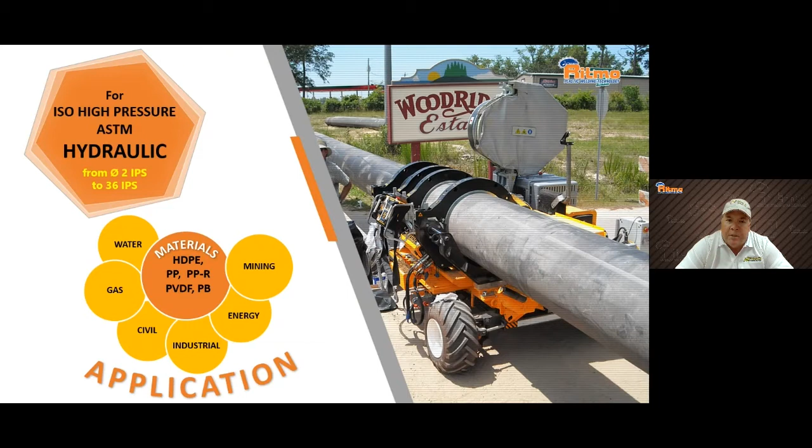The all-terrain unit operates through the Easy Life system. You've got a self-propelled drive system depending on the size of the unit. It could be a two-wheel drive, two-wheel steering unit, as well as when you get to the larger unit, like the 24-inch machine, it's a four-wheel drive, four-wheel steering, and you can actually crab crawl this particular unit on the job site for easier use.

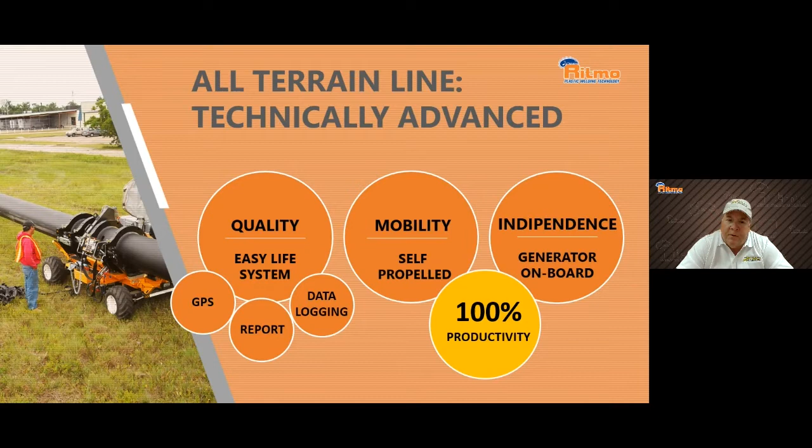All of our units can be used with IPS inserts, DIPS inserts, and millimeter pipe inserts as well, all of which can be changed in and out with our smart lock technology for changing the inserts into the jaws. We use a master cylinder, a master insert, when going from some of our 14-inch equipment down to the 4, 6, and 8 sizes, and also when we go up to our 36-inch machine coming down to 14-inch, we'll use a master insert system as well.

Here on the diagram of the Delta 355 all-terrain, you'll notice that the control panel is to the right. We've got the onboard generator in the back for our 355 units. They are all Honda motors. Once you go to the 500, the 20-inch machine, or the 630, the 24-inch machine, or even the 1000, the 36-inch machine, we switch over to a diesel motor power.

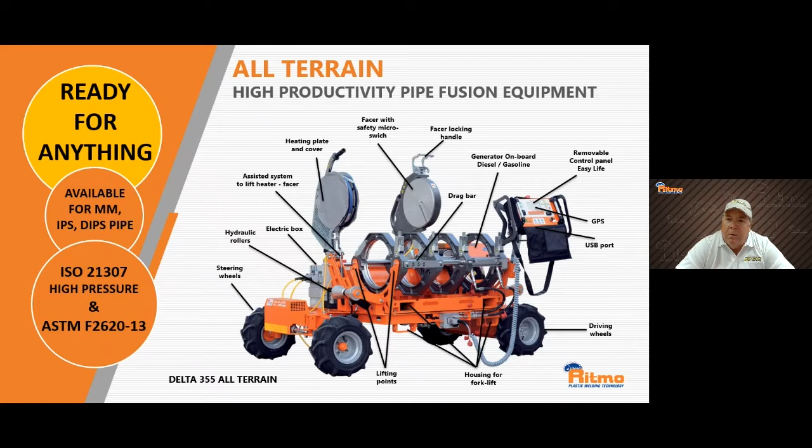For in-ditch use, we can very easily pull off the set of jaws from the chassis of the unit. There is an in-ditch kit required to go with this when you do so. The nice thing about this design is we do not have to remove the fourth jaw or the outer jaw in order to accommodate T's, crosses, lateral Y's, or elbows. We can simply make an adjustment with how jaws 3 and 4 are bracketed, so we're not losing parts or pieces. We can simply adjust the jaws to accommodate those fittings.

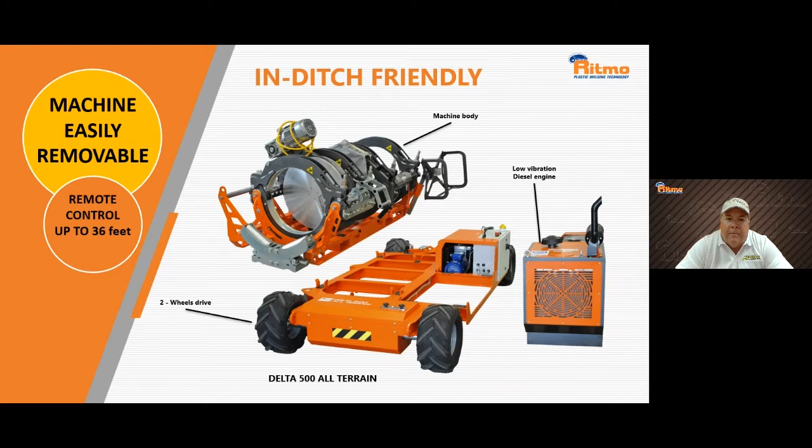On our small sizes, we have two manual size units that go from 1-inch to 5-inch, and then a manual unit that goes 2-inch to 6-inch. As far as hydraulic goes, we have a 2-inch to 8-inch machine, and a 4-inch to 14-inch machine. So that's the Delta 250 trailer, and then the Delta 355 trailer and all-terrain.

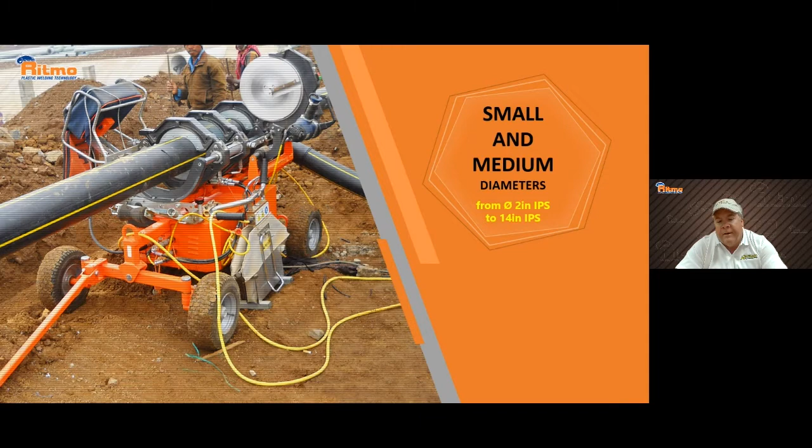There's the mention of the smart lock patented device that allows for quick and easy removal of the inserts on any of the units of this size.

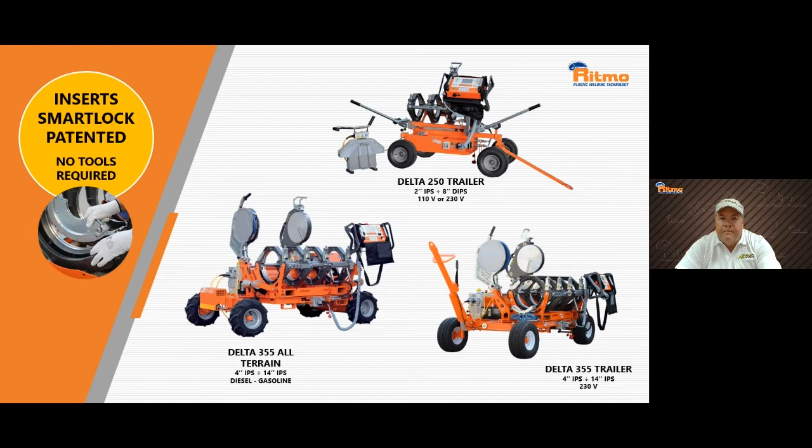The medium diameter, we're going to jump from 8-inch up to 20-inch IPS. That encompasses typically the Delta 500 trailer or Delta 500 all-terrain. Those will range from 6-inch IPS, and the jaws themselves will actually allow you to do 20-inch IPS as well. The one thing you'll notice about these pictures and the previous pictures with the trailer, the Delta 250 trailer and so forth, is that the control panels are all identical, the same. So if you can operate that 2-8 unit, you can operate the 14-inch machine, the 20-inch machine, 24, 36-inch machine, etc.

The one feature that our 500 unit has is our patented assisted jaw opening and closing. They're essentially assist cylinders. Those jaws can become pretty heavy when you've got any of the inserts in there, whether they're the 6-inch, 8, 10, 12, etc. So there is an assist device on each one of those jaws to accommodate that weight as you put those inserts in and out.

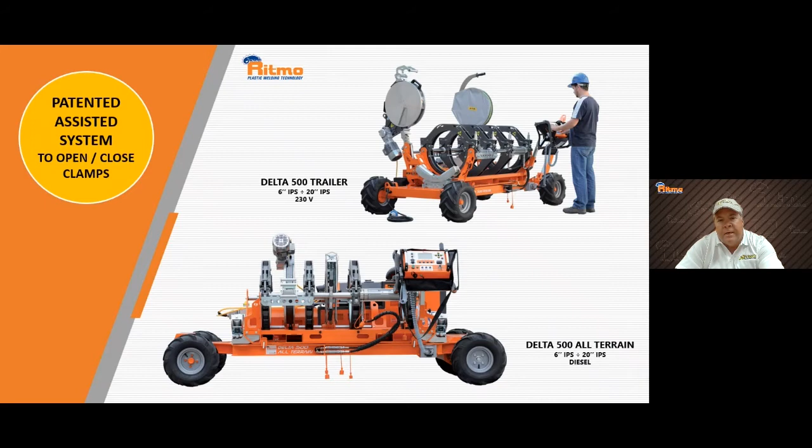The medium to large, now we're jumping up to the units that will go up to 24-inch and even 36-inch. On that 24-inch machine, which is the Delta 630 trailer or Delta 630 all-terrain, or even going up to the Delta 1000 trailer, all of those jaws are hydraulically opened and closed, hydraulically locked. The heating plate, the facer, even the pipe rollers to guide the pipe into the jaws, those are all hydraulically driven so that it's a lot more user-friendly and allows you to operate it in a more safe environment. This 24-inch machine here in particular is the four-wheel drive, four-wheel steering, which allows you to crab crawl the unit around the job site for easier maneuverability.

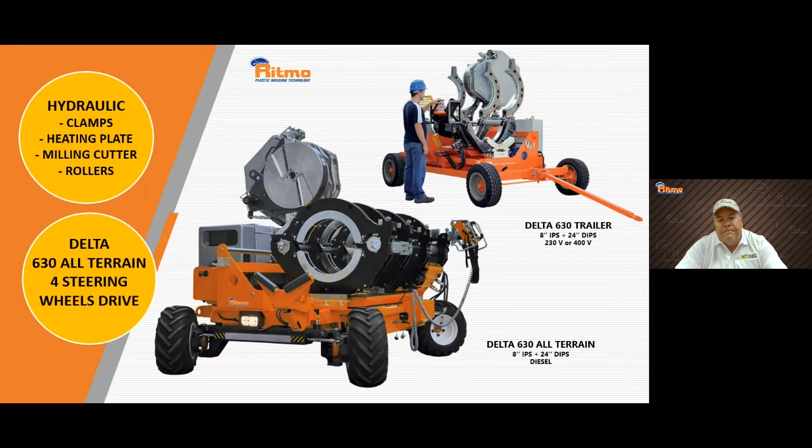Large diameter unit, the largest one we have goes up to 36-inch IPS. And with a set of master inserts, you can reduce that all the way down to 14-inch IPS. So that's quite a range, going from 14 IPS all the way to 36-inch IPS.

This particular unit is our trailer unit. It requires a power source. The control panel is still your standard Easy Life control panel. It's not interchangeable with the smaller units, but the operation and the design are identical. So if you can operate one, you can operate all.

A little piece of information that's going to be happening here real soon for Ritmo and EGW, and that is this 36-inch unit will soon be available in the US on tracks as well.

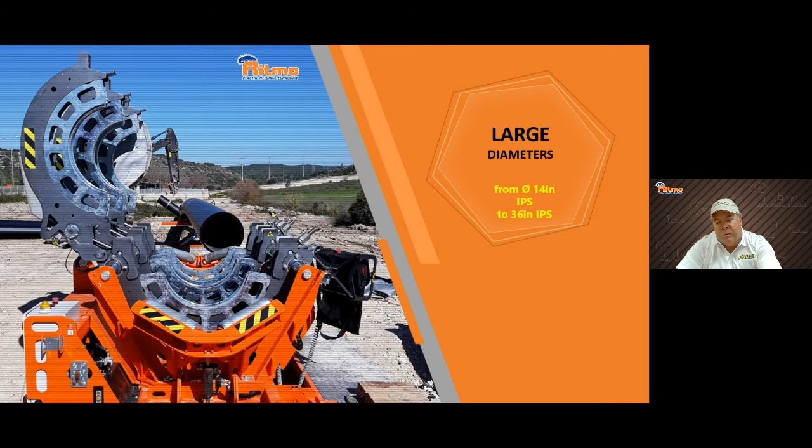There again, the operation of the 36-inch unit, you've got hydraulic jaws that help opening and closing, hydraulic locking of the jaws. Same thing with the heater plate and the facer. All of this is designed to increase productivity, safety, and efficiency.

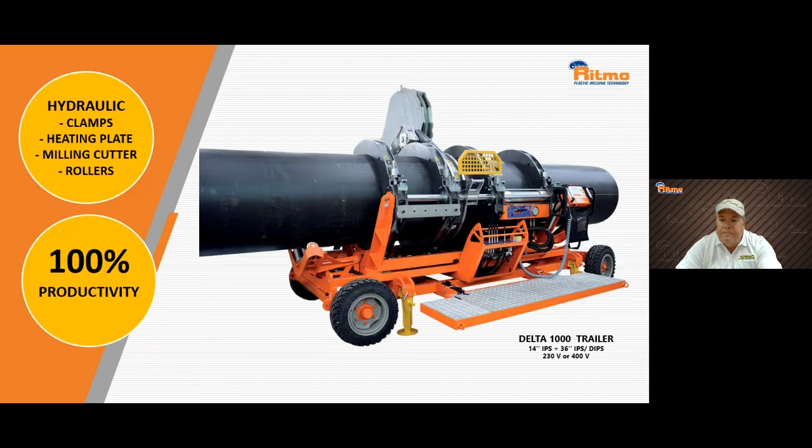As you look through the list of differences, or I should say more along the similarities between the all-terrain line and the trailer line, essentially every component on every machine from your 2-inch to 8-inch, all the way up to your 36-inch machine are all identical.

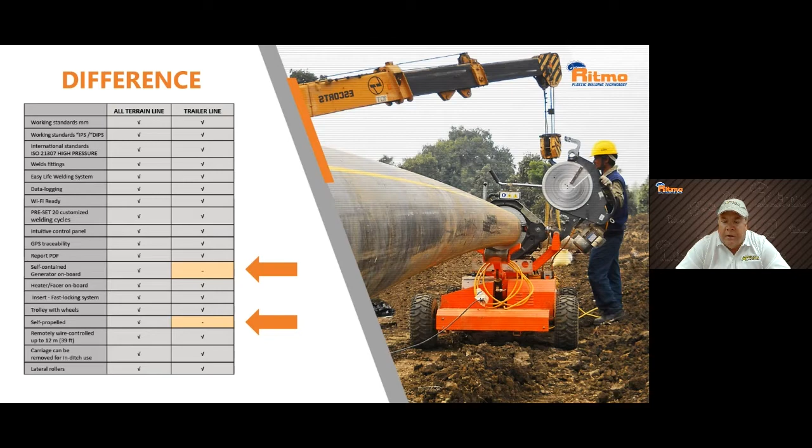The only difference between the trailer line and the all-terrain is the onboard power source and the drive system, the self-propelled drive system. Everything else is standard across the board, including the Easy Life operation.

The Easy Life system for us is our way to ensure that every single joint is done identical to the previous.

The operator is trained in the basic setting of drag pressure, facing, preheat, watching your bead form, going into soaking for the time parameter called for or the visual bead size calls for, and then finally into the cooling or fusion step 3. This Easy Life system will

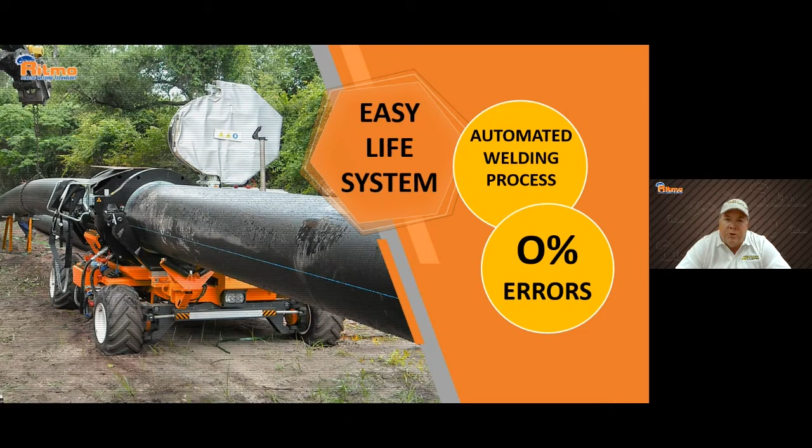essentially force you to follow those steps throughout the procedure. And if it's followed that way, you'll get the consistent bead and reduce your errors to as close to zero as possible.

The one thing that we have done to go with our Easy Life system is our Ritmo Set and Go app. Currently, you can download this from any app store for free, and you will be able to access all of our equipment, all of our hydraulic equipment, from our 1-inch to 5-inch hydraulic unit all the way up to our 36-inch hydraulic unit. And they're all identified as the ASTM spec.

In addition to those, you can also get those units all the way up to 63-inch. And with that, you can select the various other standards, whether it be for DVS or ISO. All of those are available there as well.

So essentially what you do is you go in, you select your machine, you select the ASTM standard, select your pipe size. In today's demo, we're going to do 4-inch IPS. The SDR is 11.5. And you'll be able to look at that on your app, put it right into the Easy Life control panel, and follow the steps.

Set drag pressure, face it, preheat, soak, cool. At the end of it, you can then download straight out of the Easy Life control panel on a USB thumb drive, and download it and essentially email it anywhere with an update to the system, to the app, and to the Easy Life system.

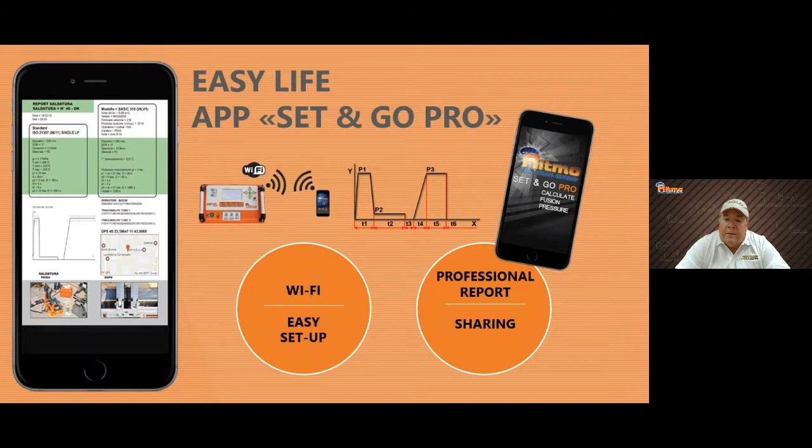You can communicate it, allow it to communicate back and forth between your smartphone and the control panel via Wi-Fi, which will allow you to essentially email it live time to somebody who is putting together a report for you.

When it's all said and done, our all-terrain and trailer lines, the benefits are increased performance, decrease of errors, enhanced productivity, easy to use, a system that will take you from 2-inch to 36-inch, all while following the ASTM F2620. It will allow you to have a GPS coordinate of every single weld that you've done, which allows for traceability, simple in-ditch use, and ultimately a successful and safe job site.

So that's the end of my presentation here.

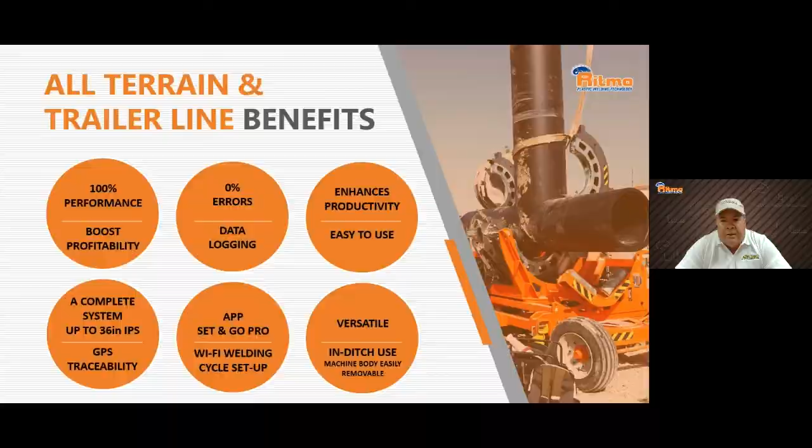The next thing we will do is we will pull up a video, a demo video that we did recently with the Delta 250 trailer. And we will do the 4-inch IPS and SDR 11.5. And I will talk through the procedure as we do it, followed by the remaining short question and answers. Thank you, everyone.

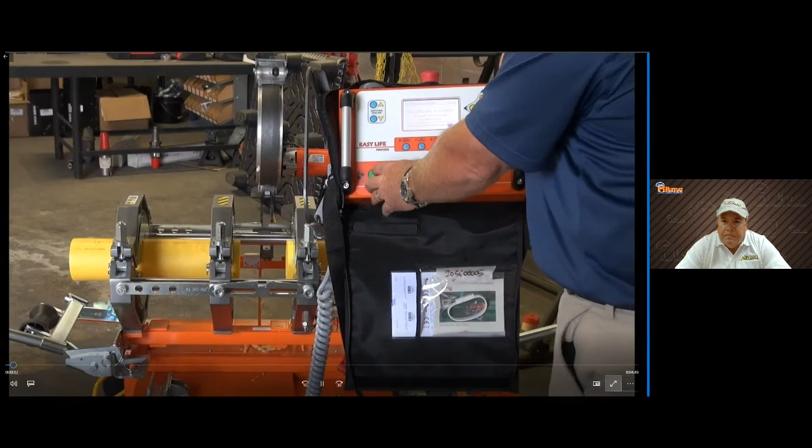So here we are, we've got the machine set up. I'm setting the drag pressure, and by setting the drag pressure, I open the jaws up all the way. I push the OK button, which is a safety feature on the Easy Life control panel. Then I pushed the drag pressure button once. As soon as I saw the jaws move, I pressed it a second time, which automatically records your drag pressure. It puts it into the system and adds it to your fusion pressures that have been preset into the machine. At which point, I open the jaws back up.

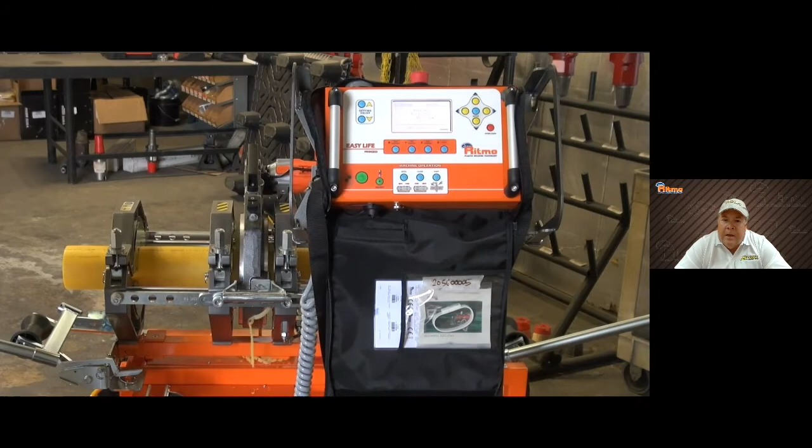I then installed the facer, put it into the facing mode, and then it started facing. At this point, we are facing to the stops, which we have on this facer, both in the front and the back. I know there are those out there that don't face to the stops—they look for the long continuous strips off of both sides of the pipe. But in our case, we can do both.

Now what I'm doing is I'm closing the pipe, checking for my alignment, looking for a high-low, front-back, making sure that everything is lined up well.

At this point, we can take isopropyl alcohol, clean the face of the pipe, open the jaws back up completely, push the OK button to make sure everything is being followed procedure-wise. Push button number 1 for preheat, which closes up against the heater.

Now we're just looking for the bead to form on both sides of the heater, all the way around the pipe. Once I see it's there, then I go to the soaking mode, which drops the pressure to drag pressure only.

And it soaks for a parameter. We put a default time parameter in here. So with that, I will start watching the bead, and you'll see me reach up and adjust the time parameter with the up and down buttons, and I'll actually decrease the time a little bit because I actually see the bead forming well.

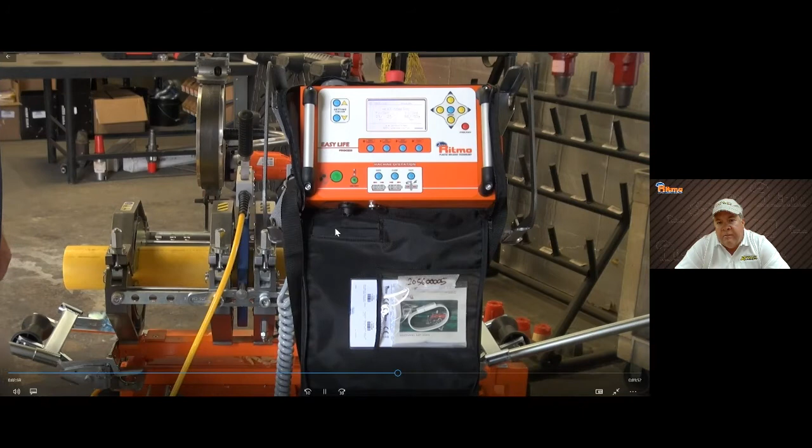Sorry, I'm using the hand motion there. I was actually talking to the operator of the camera during this video shoot last week.

So there it goes, it pops off both sides. I hit the button, it comes back together, forms the bead, and starts the countdown for cooling.

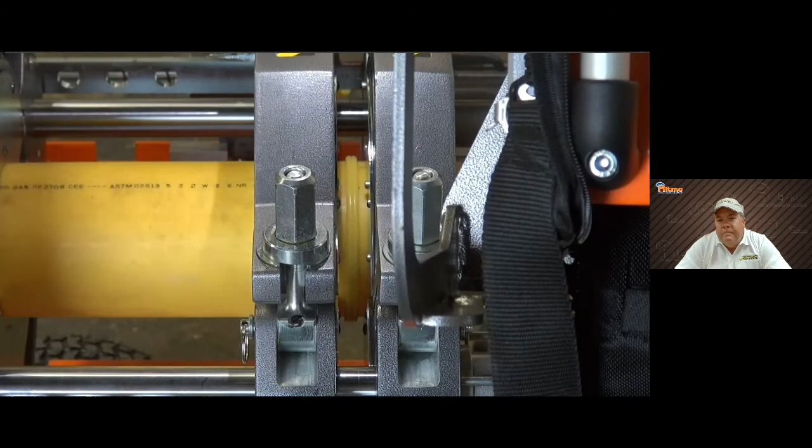Following this procedure, every bead, every joint should look almost identical to each other. And it's the same all the way around. It's a nice looking bead.

So at this point, it's going to cool for 4-inch SDR 11, which calls for somewhere between 4 and 5 minutes. So in an effort to get to question and answers, I will let Mike know that this part of the demo video has concluded and we're ready for some Q&A. Thank you.